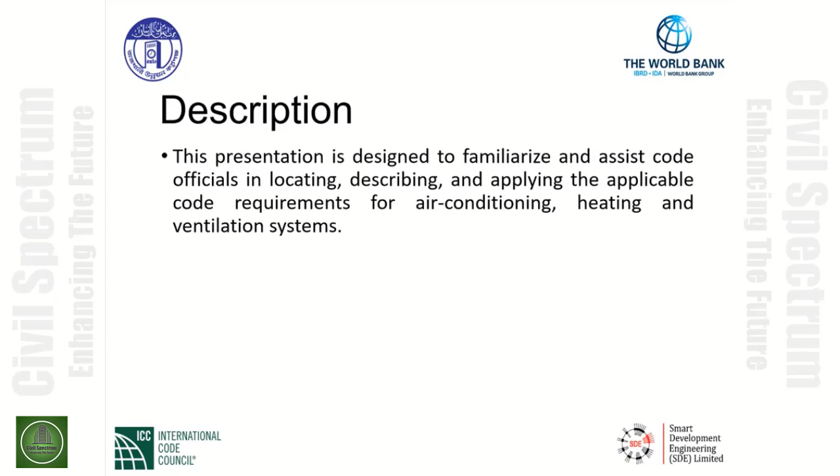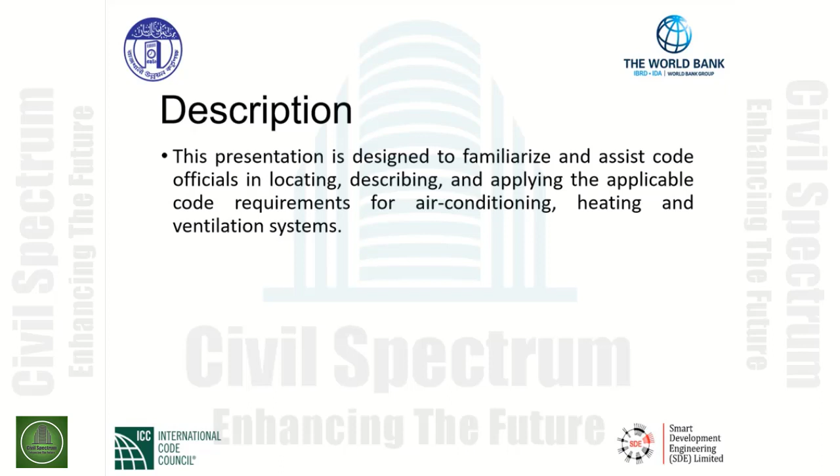The description of this presentation is designed to familiarize and assist code officials, inspectors, engineers, designers in not only locating the code sections, but describing and applying the applicable code requirements for air conditioning, heating, and ventilation systems. The overview.

Internationally, code officials recognize the need for a modern, up-to-date mechanical code that addresses the design and installation of mechanical systems through requirements, emphasizing performance. This presentation will cover key topics of the following areas. We will cover scope, application, and terminology. Terminology is so important. We need to understand certain language for mechanical systems. We will go over that systematically and accordingly.

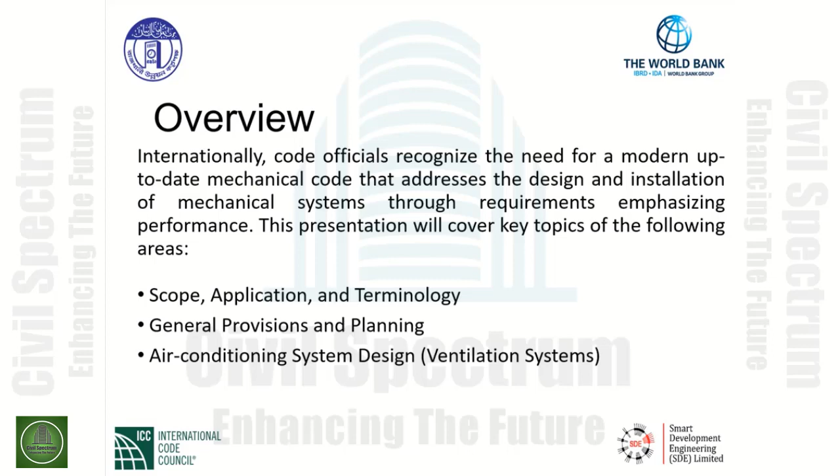Second part is general provisions and planning, and then we'll finish up with the air conditioning system design with the focus on mechanical ventilation systems and natural ventilation. The seminar goal. The goal of this training is for you to learn and apply key code requirements contained in Chapter 2, Air Conditioning, Heating, and Ventilation, to enhance your performance while inspecting these systems. We will also give you examples and applications based upon design criteria and examples as well.

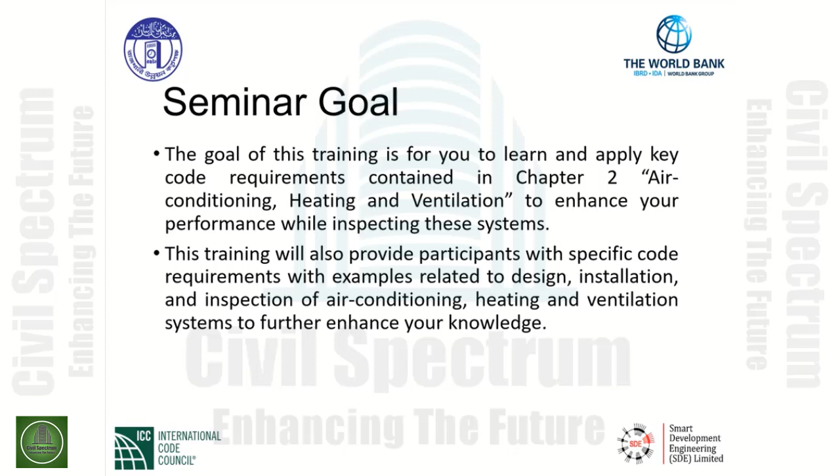This training will also provide participants with specific examples related not only to design, but installation and inspection of air conditioning, heating, and ventilation systems to further enhance your knowledge. The objectives of this presentation will allow you to be better able to locate general topics in Chapter 2 regarding air conditioning, heating, and ventilation. Locate applicable codes and standards for specific situations. Apply code requirements to real-world situations. And explain the intent behind a given code requirement.

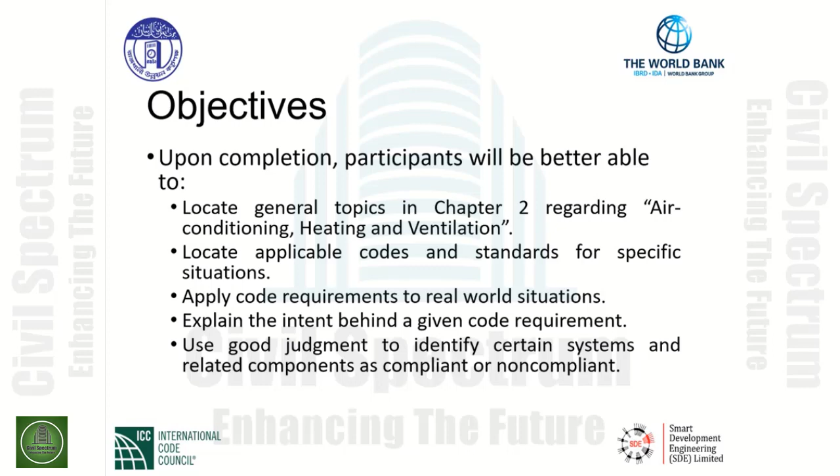We need to understand that the intent behind a given code requirement needs to be explained. It needs to be applied based upon applications. We'll go over that systematically. And finally, using good judgment to identify certain systems and related components, either as being compliant or non-compliant. And this is based on the requirements set forth in Chapter 2. Specifically, we will focus on ventilation systems towards the end of the seminar, and we'll have examples showing you the proper application of these requirements.

Chapter 2, Section 2.1, General. The purpose of this chapter is to provide minimum standards, not only for regulating and controlling the design, but also the construction, installation, quality of materials, location, operation, performance, as well as maintenance and the use of air conditioning, heating, and ventilation systems to ensure acceptable conditions of air inside the building required for human health, safety, and welfare with energy conservation. An air conditioning, heating, and ventilation code cannot be effective without adequate provisions for its administration and enforcement.

The authority or the official has the responsibility for establishing that the homes in which the citizens of the community reside and the buildings in which they work are designed and constructed to be reasonably free from hazards associated with the presence and use of mechanical equipment, appliances, and systems. We have this code as it states in the language that was initially introduced to provide human health, safety, and welfare with energy conservation. The code is designed with requirements, design criteria that engineers must use to properly design these systems, inspectors to inspect these systems, and this way the end result is a safe and healthy environment for everybody within homes and buildings.

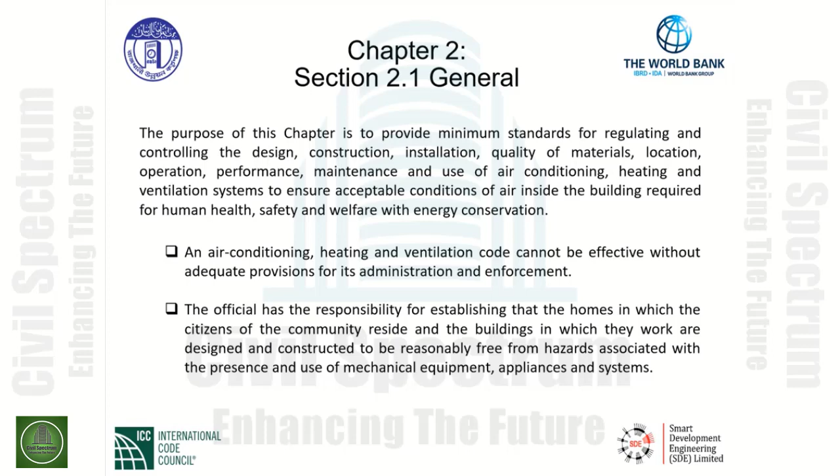The official or the authority is charged with the administration and the enforcement of mechanical regulations and also has great responsibility. And with this responsibility drives authority. We need to make sure that not only the design but the installation complies with the requirements of this code. Quality of materials are so important. The air conditioning, heating, and ventilation code intends to establish a minimum acceptable level of safety. We can exceed what the requirements are in this code, but we can never go below the minimum acceptable thresholds in this code.

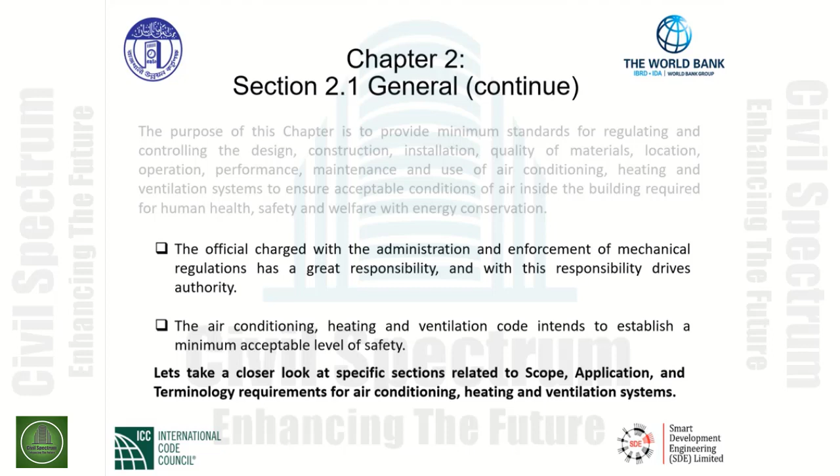So let's take a closer look at specific sections related to scope, application, and terminology requirements for air conditioning, heating, and ventilation systems. Section 2.2, Scope.

Specifically in Section 2.2.1, it indicates the provisions of this code shall apply to not only erection, but also installation, alteration, any repairs, maybe relocation of equipment, appliances, replacements are covered, as well as additions, maybe additions to air distribution systems, hydronic piping systems, things of that nature. Also use and maintenance of any air conditioning, heating, and ventilation systems. This section gives us the driving language as code users to understand our scope to get into this particular code. This section describes the types of mechanical systems covered by the code.

The code is applicable from the initial design of mechanical systems through installation and construction, and finally into the maintenance of operating systems. Our systems must be maintained. They must be cleaned regularly. They must comply with the manufacturer's installation instructions and maintenance as well for proper operation through the life of these systems.

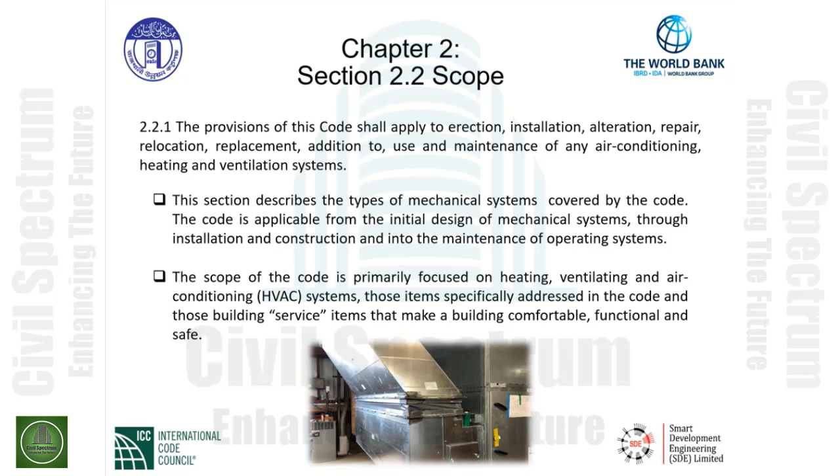The scope of the code is primarily focused on heating, ventilating, and air conditioning systems, HVAC systems. Those items specifically addressed in the code and those building service items that make a building comfortable, functional, and safe.

In section 2.2.3, this key section gives us the requirement where in any specific case, different sections of this code specify different materials, methods of construction, or other requirements. We need to look at the most restrictive one as that shall govern. Where there is a conflict between a general requirement and a specific requirement, the specific requirement shall be applicable.

The first part of this section essentially describes where there could be dual coverage and states that the most restrictive prevails. We will look periodically at a general requirement giving maybe a general layout, maybe a general area of installation. Whereas when you get deeper into the code, it may address a requirement more specifically based upon your application, which will have to be evaluated and looked at to be the most restrictive.

The code official must carefully evaluate each application regarding materials, methods of construction, or other requirements and make decisions that provide the greatest safety. And as mentioned previously, this is where authority comes in. We need properly trained people to administer this code, properly trained and technical people to enforce the code as well.

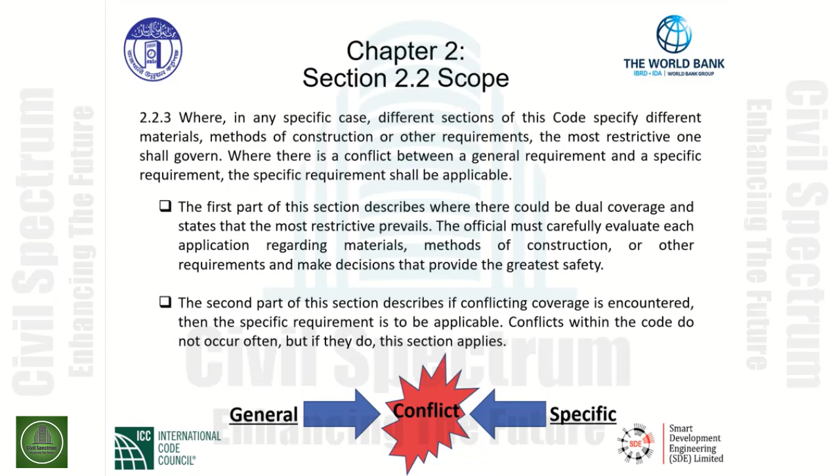The second part of this section describes if conflicting coverage is encountered, then the specific requirement is to be applicable. Conflicts within the code do not often occur, but if they do, this section applies. Chapter 2, Section 2.3, Application. It shall be unlawful to install, extend, alter, repair, or maintain air conditioning, heating, and ventilation systems in or adjacent to buildings, except in compliance with this code.

This section, ladies and gentlemen, is telling the code user that we need to comply with this code, not only for design and installation, but also extending systems. In the graphic below, we see that we have a hydronic piping system that has been recently extended from one part of the system to a new part for a building addition.

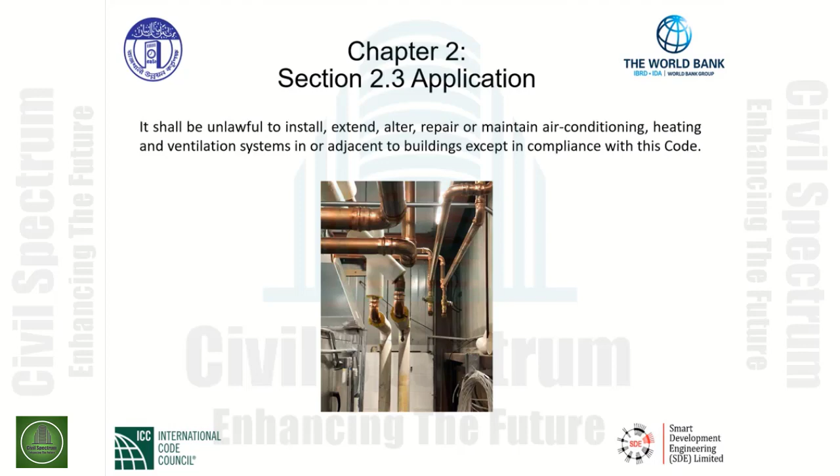It not only lends itself to installations, extensions, but also alteration, repairs, and maintenance as well. So the application covers everything with respect to the air conditioning, heating, and ventilation systems. This is the initial language and requirement that we need to get into in Section 2.3. Section 2.3.1 is now specific to existing installations.

Air conditioning, heating, and ventilation systems in existence at the time of adoption of this code may have their use, maintenance, or repair continued if the use, maintenance, or repair is in accordance with original design and location, and no hazard to life, health, or property has been created by such system. What this section is telling us specifically is the existing mechanical system is generally considered to be allowed to continue in accordance with the original design if the system meets a minimum level of safety.

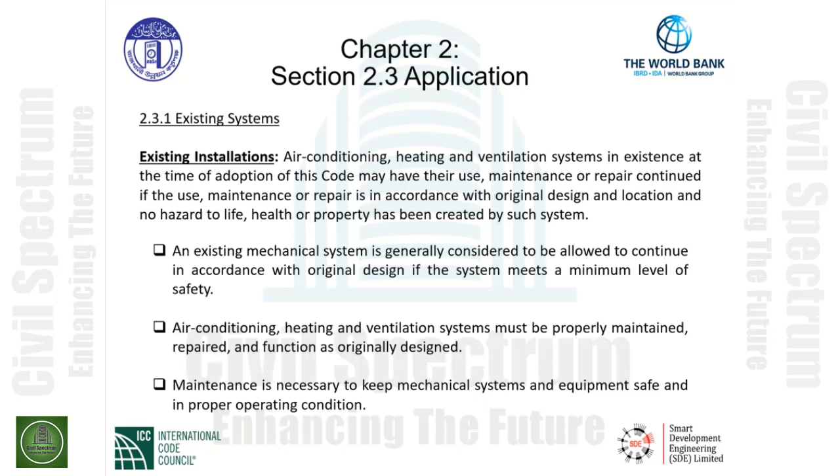We need to be concerned with the proper maintenance of these systems to keep them functioning as originally designed. The air conditioning, heating, and ventilation systems, of course, must continue to be properly maintained, properly repaired, and function, of course, as they were originally designed. Maintenance is so necessary to keep the mechanical systems and equipment safe and in proper operating condition.

Additions, alterations, or repairs. This is getting, again, more specific as it relates to additions of systems, alterations of systems, or repairs of systems that may be made to any air conditioning, heating, or ventilation system without requiring the existing system to comply with all the requirements of this code, provided the addition, alteration, or repair conforms to the requirements of a new system. Additions, alterations, or repairs shall not make an existing system unsafe, create unhealthy or overloaded conditions.

Now, this last language is the driving language of this section. As code users, we must understand that the existing systems have the right to exist, provided they have been maintained as originally designed and function accordingly, as we saw in the last slide. However, if we decide to provide any alteration or an addition to an existing system, it involves some extent of new work, then the new work is subject to the requirements of this code.

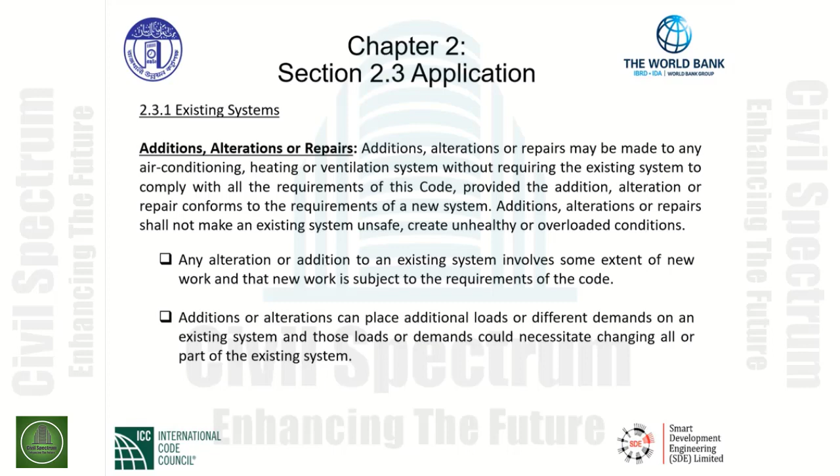Additions or alterations can place additional loads or different demands on an existing system, and those loads or demands could necessitate changing all or part of the system. So it's very important that we analyze the existing systems due to, again, these additional loads or different demands.

A duct addition example is shown here. The language in the code section that we just discussed: additions, alterations, or repairs shall not make an existing system become unsafe or create any unhealthy or overloaded conditions.

The picture below shows a new air distribution supply duct added to an existing system. Prior to adding the ductwork, the existing air distribution system was analyzed to verify the added demand on the system, and it was found that there was enough capacity to supply a new branch to a new building addition. This installation from the attachment of the existing system must comply with the new code requirements.

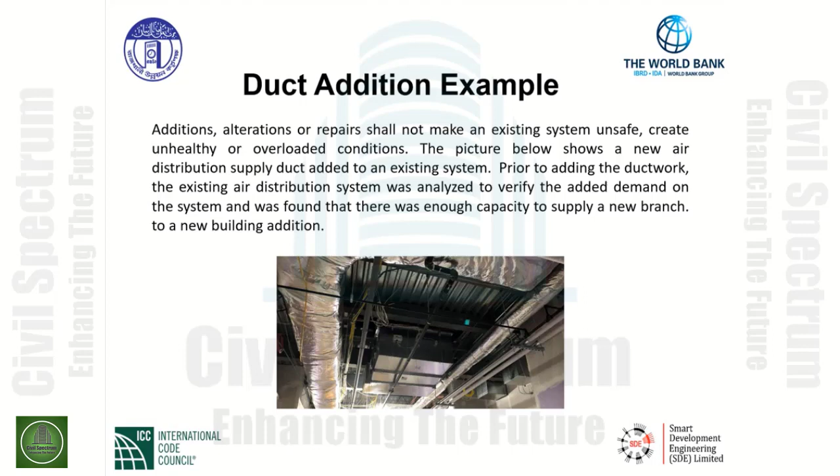Changes in building occupancy. Air conditioning, heating, and ventilation systems, which are part of any building or structure undergoing a change in use or occupancy, as defined in the building code, shall comply with all requirements of this code which may be applicable to the new use or occupancy.

When a building or any part of a building undergoes a change of occupancy, not only the building but the mechanical system must be evaluated to determine what effect the change of occupancy has on it. And depending on the nature of the previous occupancy, changing a building's occupancy classification could result in a change to the mechanical system. A change in occupancy could require changes to an existing mechanical system to accommodate the needs and requirements for the new occupancy.

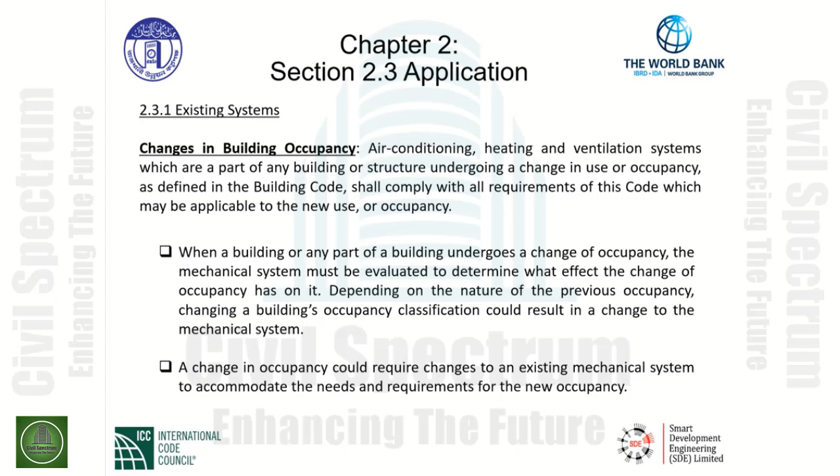We may be into exhaust systems. We may be into increasing the ventilation, bringing in more outdoor air to dilute contaminants in certain areas and zones of the building, whereas the previous occupancy did not have such a high demand. And again, it's all dependent upon the new use or occupancy that the building or space is being changed to that must be analyzed.

Consider an office building that will be converted to a restaurant. The mechanical systems must be altered as necessary to comply with what the code prescribes for such assembly occupancies. This is clearly a change in occupancy, or in other words, the existing office building will function much differently as a restaurant. The restaurant is more densely populated in the dining room, whereas in an office building we do not have such a dense population.

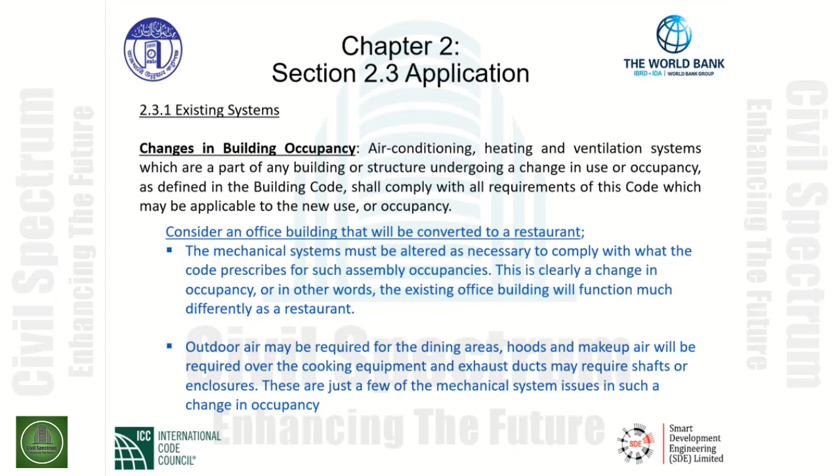Additionally, with a restaurant, we may have a commercial kitchen installed that needs exhaust systems, makeup air systems, and heating, cooling, and ventilation systems installed for that function within the new restaurant. Outdoor air may be required for the dining areas. Hoods and makeup air will be required over the cooking equipment. And exhaust ducts may require shafts or enclosures that must be compliant with the building code requirements. These are just a few of the mechanical system issues in such a change in occupancy.

The change of occupancy indicated in the photos below involved an existing office building that was converted to a restaurant. This is considered a change of occupancy. The office building was converted to a restaurant that includes a dining room and a brand new commercial kitchen. The new commercial kitchen required new air conditioning, new exhaust systems, a makeup air system, and ventilation systems to be installed. And as you can see in the picture on the left-hand side, we have the exhaust equipment and appliances coming through the roof of the building.

Additionally, the seating area of the restaurant required the existing air conditioning system to provide more ventilation, given more occupants in that area. This is a mechanical ventilation system that brings in outside air. It was analyzed and modified to introduce more outside air in liters per second and was calculated for the occupant density given this new change of occupancy.

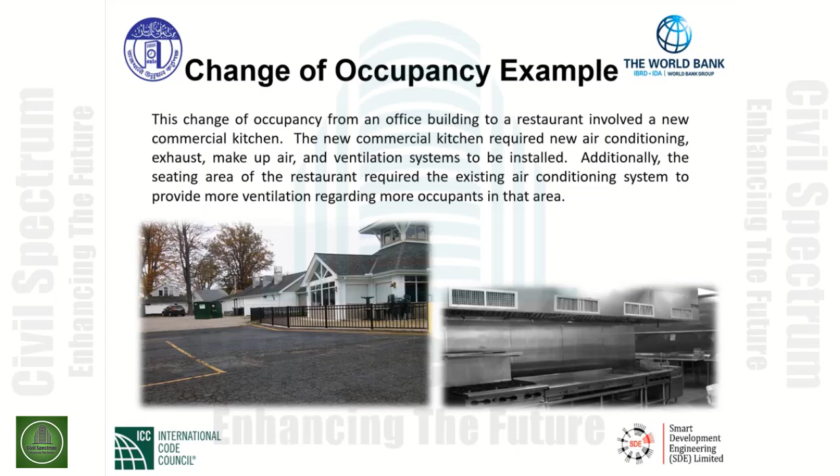Maintenance. All air conditioning, heating, and ventilation systems, materials, and appurtenances, both existing and new, and all parts thereof shall be maintained in proper operating condition, in accordance with the original design and in safe, hazard-free condition.

Additionally, we need to look at this last couple of sentences. All devices or safeguards which are required by this code shall be maintained in accordance and conformance with this code. The owner or the owner's designated agent shall be responsible for maintenance of the systems and equipment.

Maintenance is necessary to keep the mechanical systems and equipment safe and in proper operating condition. We typically have safety devices, controls that need to be maintained in order to continue providing the protection that they afford. Additionally, all safeguards required by the previous or present codes must be maintained for the life of the equipment or systems served by those safeguards.

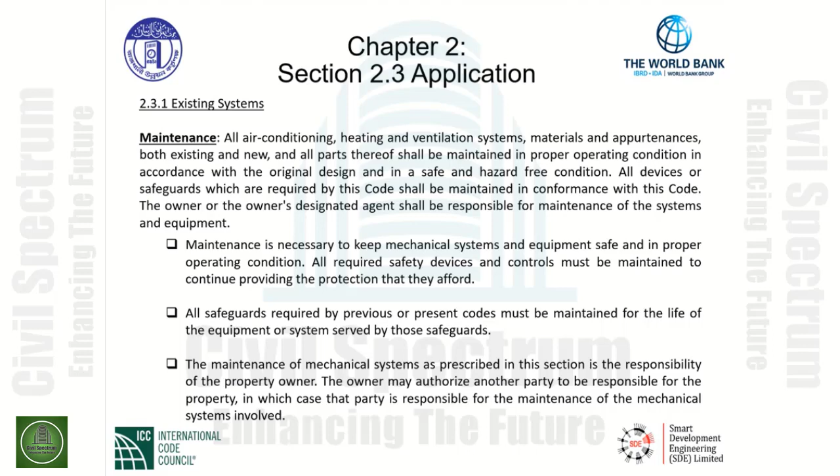Lastly, the maintenance comes in, and it was indicated the maintenance of mechanical systems as prescribed in this section is the responsibility of the property owner. The owner may authorize another party to be responsible for the property, in which case that party is responsible for the maintenance of the mechanical systems involved.

Section 2.3.2 contains requirements for alternative materials and methods of construction. The provisions of this code are not intended to prevent the use of any material or method of construction not specifically prescribed by this code, provided any such alternative material and/or method of construction has been approved and the use authorized by the authority.

The fact that a material, a product, or method of construction is not addressed in the code is not an indication that such material, product, or method is intended to be prohibited. The authority is responsible for determining if a requested alternative provides the equivalent level of protection to public property, health, safety, and welfare as required by code.

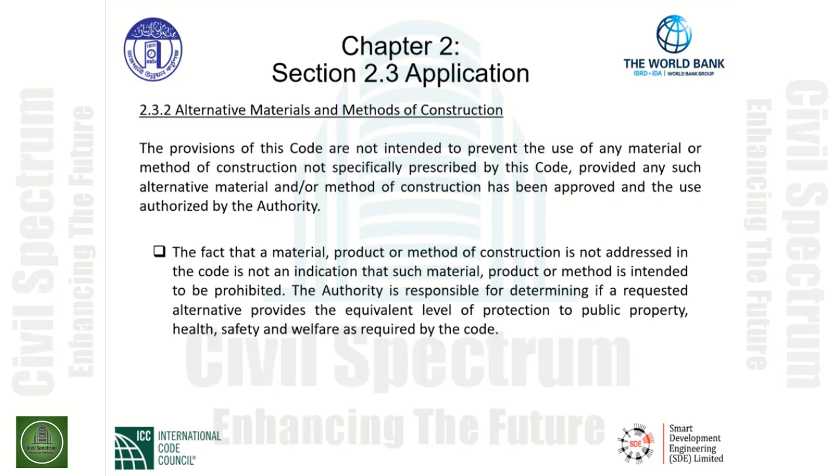Now, an alternative material may be an application-related material that fits the engineered design and can be approved by the authority. The authority shall require, however, that sufficient evidence or proof be submitted to substantiate any claims made regarding the use of alternatives.

As stated in this particular requirement, the alternative material or method of construction may be approved where, in fact, the authority finds that the proposed design is satisfactory and complies with the intent of the provisions of this code, and that the material, method, or work offered is, for the purpose intended, not less than the equivalent of that prescribed by this code in quality, strength, effectiveness, fire resistance, durability, and safety.

So as you can see here, given that we do have the alternative materials and methods of construction section, the main part of this requirement is that the quality of materials, perhaps the strength of materials, the effectiveness, even fire resistance rating, along with durability and safety, is a key requirement that must be analyzed and proven to the authority. Once the authority has that data, then the authority can approve alternative materials and methods of construction.

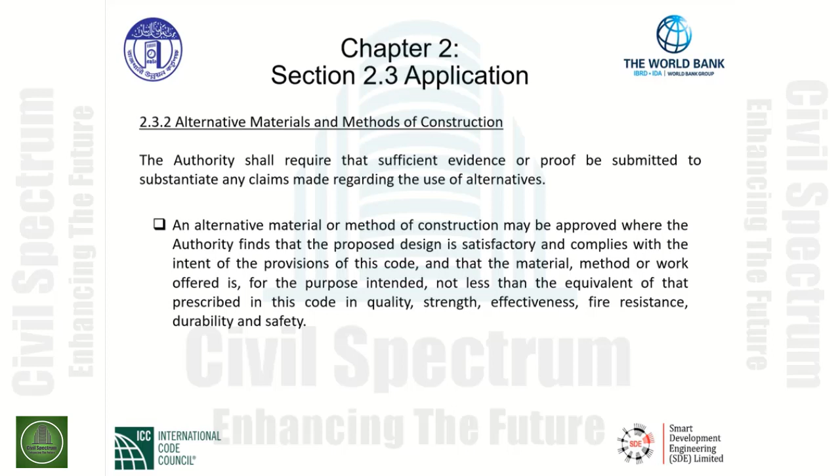An example is the ICC Evaluation Service Report. Testing methods specified in this code or by other recognized test standards, along with the testing performed by approved agencies, can be submitted to the authority. This is a mechanism that can be submitted to the authority for approval.

These research reports from approved sources may be submitted when an alternative material or method is proposed for construction. The ICC Evaluation Service is just one example of an agency that provides research reports for alternative materials and methods.

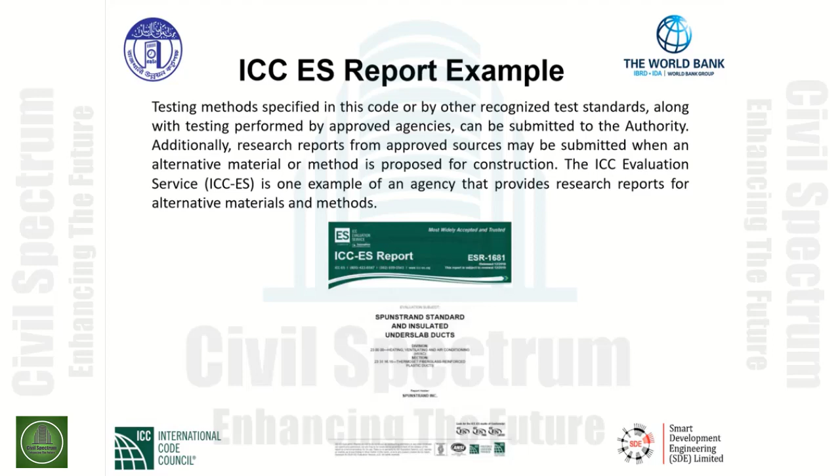Modifications. Now, modifications are not prohibited by the code. The authority, within the limitations set forth in Part 2, of course, may allow modifications for individual cases. The modifications, however, must be in conformity with the intent and purpose of the code, and such modification shall not lessen health, life, and fire safety requirements.

Now, this may be a modification to maybe a piping method being installed, maybe a duct method, or even a material, things of that nature, that must be modified given an application. Again, the authority should be provided with the analysis and intent of the modification in order to make a good decision, and determine if the modification fits the intent of the code.

So the code official or authority may amend or make exceptions to the code as needed, where strict compliance is impractical. This section is not intended, however, to permit setting aside or ignoring a code provision. Rather, it's intended to provide acceptance of equivalent protection.

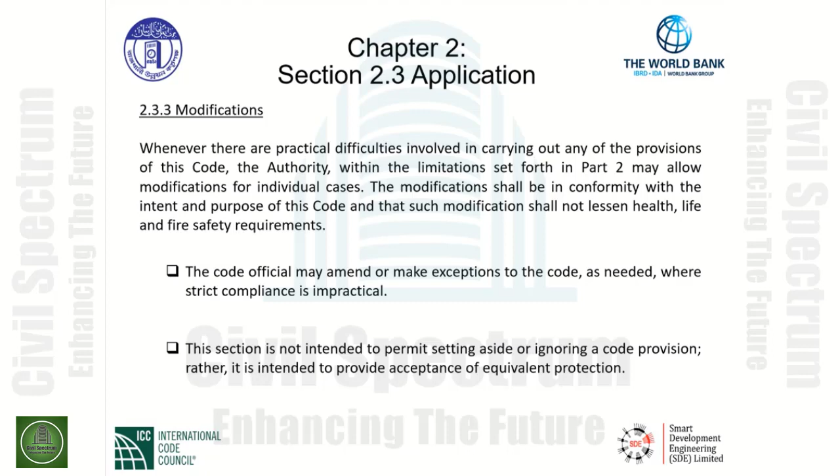As in construction, there are changes, there are modifications, there are amendments all the time, and we have to work through the process as engineers, installers, inspectors, and authorities.

Section 2.4, Terminology. Terminology is key, ladies and gentlemen. We need to specifically understand certain words, or maybe even a single word within a code section, to fully understand the intent of the code. So it's very important that we understand the language of air conditioning, heating, and ventilation.

This section provides an alphabetical list of the terms used in and applicable in this chapter of the code. In case of any conflict or contradiction between the definition given in this section and that in Part 1, the meaning provided in this section shall govern for interpretation of the provisions of this chapter.

Now, a code provision could be misinterpreted if the definition of a term as used in the context of the code is not understood. This reinforces why we need to understand the terminology for air conditioning, heating, and ventilation systems. The following slides will provide key definitions that will assist the code user to properly understand certain terminology related to this chapter.

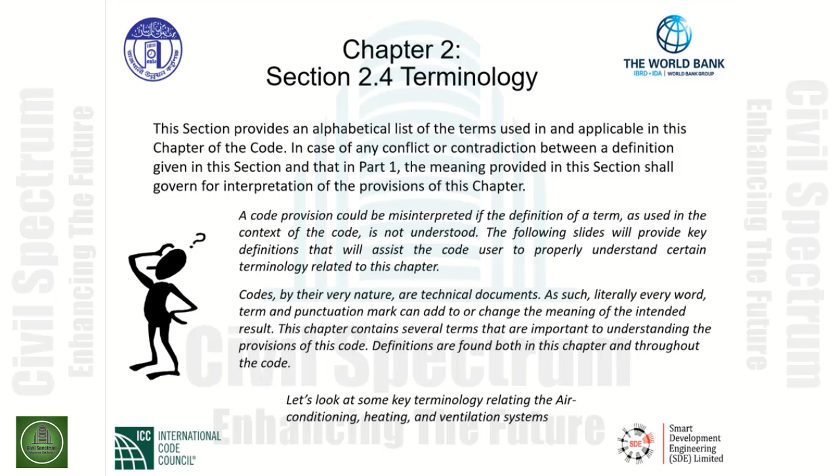Codes, by their very nature, are in fact technical documents. As such, literally every word, term, and punctuation mark can add to or change the meaning of the intended result. This chapter contains several terms that are important to understand the provisions of this code. Definitions are found both in this chapter and throughout the code. Let's look at some key terminology relating to air conditioning, heating, and ventilation systems.

Air change. Air change, by definition, is introducing new, cleansed, or recirculated air to conditioned space, measured by the number of complete air changes per unit time. The following example provides an illustration and calculation of an airflow rate entering and leaving a space. The calculation provides a number of air changes per hour, given the airflow rate and volume of space.

As seen, we have a volume of space that essentially measures 1,000 cubic meters. We have an airflow rate entering at 100 liters per second and an airflow rate leaving at 100 liters per second. The air leaving would be, in fact, the exhausted air, while the entering air is new air, completely cleansed or recirculated to the conditioned space.

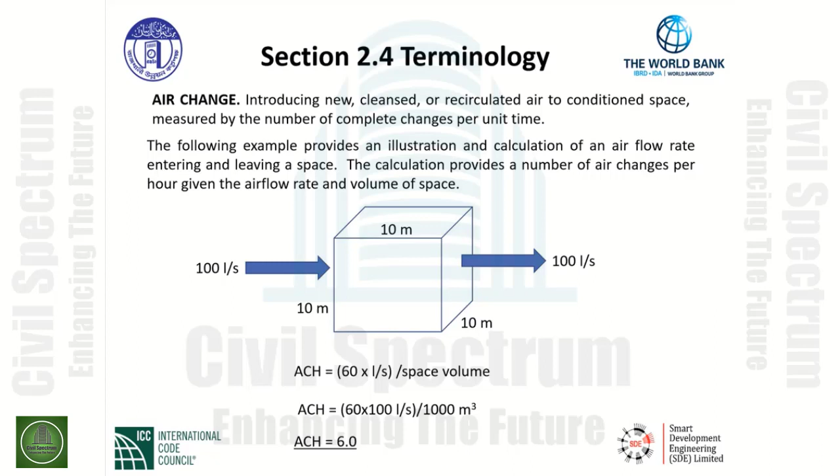The air change per hour expression, or the equation below, is as follows. The unit time we will use here is 1 hour. Air changes per hour equals the quantity 60 times the airflow rate in liters per second divided by the space volume. So in this example, we simply take 60 times 100 liters per second divided by 1,000 cubic meters. And the total air change per hour is 6 air changes per hour.

Another definition, outside air. Outside air, by definition, is very specific here. It is external air, atmosphere exterior to refrigerated or conditioned space, ambient air, or we say surrounding air. Recirculated air is in fact the part of return air passed through the air conditioner before being resupplied to the conditioned space. We also know this as return air.

Air conditioning is defined as the process of treating air so as to control simultaneously its temperature, humidity, purity, distribution, pressure, and air movement to meet the thermal requirements of the space. As you can see, this definition is very complete with respect to the criteria that goes into designing the air conditioning for a space.

As indicated, the temperature must be analyzed and maintained accordingly for the end result of this space function. Humidity as well, air purity, the distribution, the pressure, and of course, air movement into and through the space is of importance. Now going back up to the first definition that we indicated, outside air.

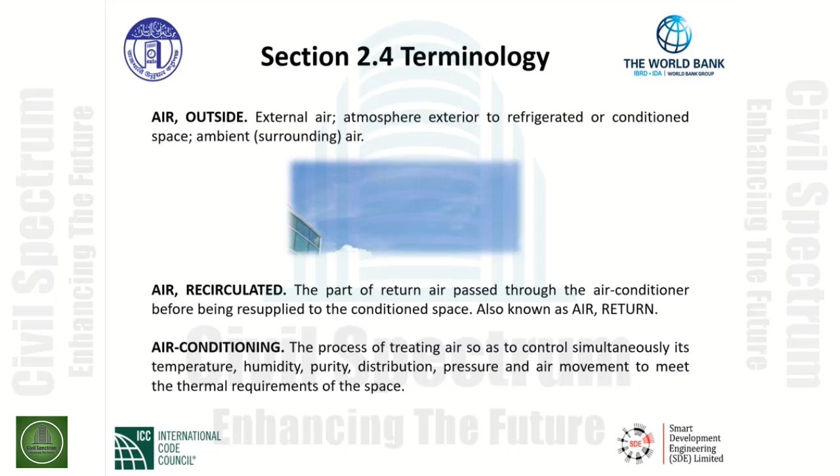This is important because in our buildings where we cannot provide natural ventilation, we must provide mechanical ventilation. That is, to take outside air into our air distribution system, air conditioning system, and mix it and deliver it to what we call the breathing zone to dilute contaminants within our buildings. And we'll speak more of that in several slides coming up.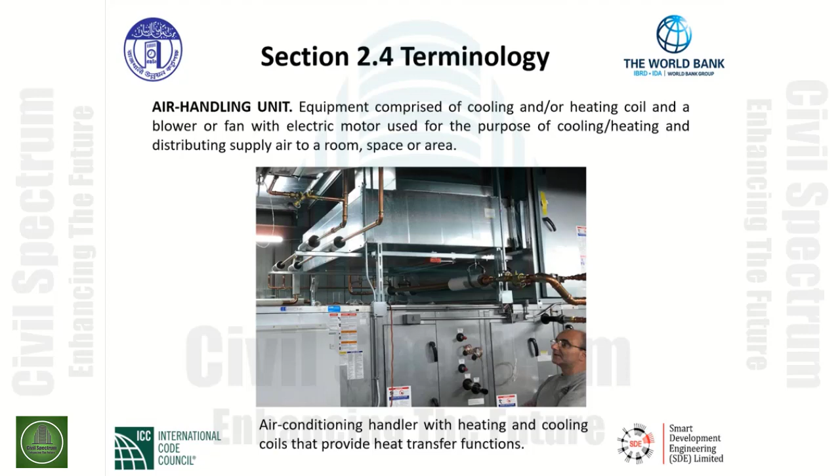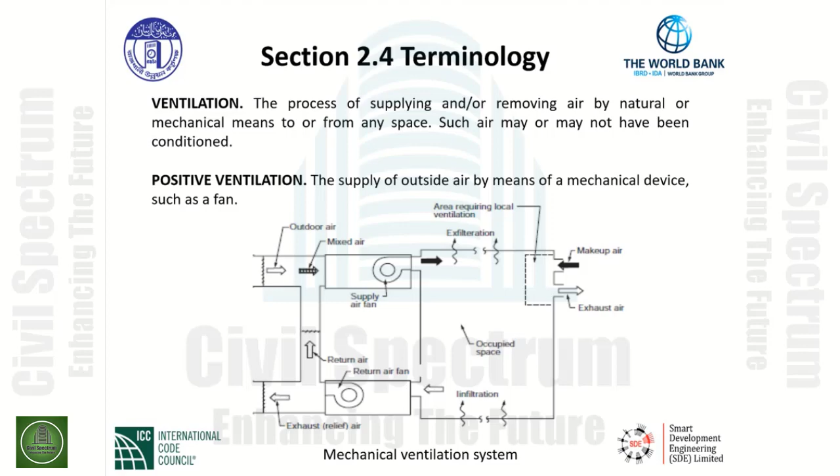We have an exhaust, relief air, and return air moving back up and then mixing again with the outdoor air to provide good, clean, filtered air into the occupied space. And this is a good example of a mechanical ventilation system and air conditioning system.

Section 2.5, General Provisions. This section provides references for air conditioning, heating, and ventilation systems, as well as associated electrical, plumbing, fuel gas, and fire safety requirements. Now, Section 2.5.1 references the ASHRAE handbooks. ASHRAE is the American Society of Heating, Refrigerating, and Air Conditioning Engineers. HI is referenced here, the Hydraulic Institute of USA.

These manuals and relevant chapters of this code for air conditioning, heating, and ventilation systems regarding the following: design, construction, installation, operation, and maintenance, give the code user a good design reference when it comes to designing air conditioning, heating, and ventilation systems by simply using these reference standards.

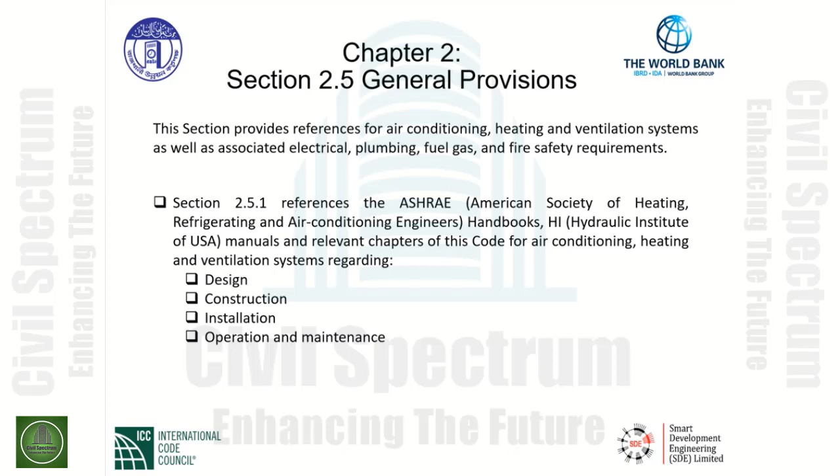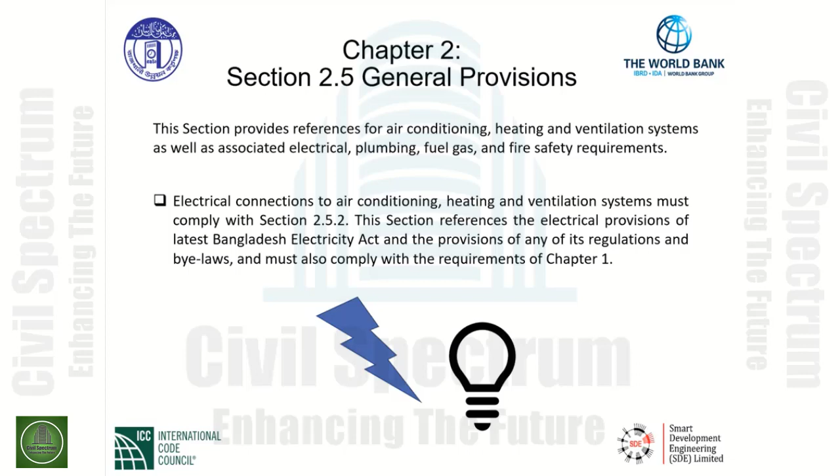This section provides references for air conditioning, heating, ventilation systems, as well as, again, the electrical, plumbing, fuel gas, and fire safety requirements. When it comes to the electrical requirements, any electrical connections to air conditioning, heating, and ventilation systems must comply with Section 2.5.2. This section references the electrical provisions of the latest Bangladesh Electricity Act and the provisions of any of its regulations and bylaws, and must also comply with the requirements of Chapter 1.

Section 2.5.3 gives us requirements for all plumbing work in connection with air conditioning, heating, and ventilation systems shall be carried out in accordance with the provisions and guidelines of ASHRAE handbooks and HI manuals. Additionally, Section 2.5.4 gives us requirements for all gas and fuel piping in connection with air conditioning, heating, and ventilation systems shall be carried out in accordance with the provisions of Chapter 8.

Below is an example of a boiler that is a gas-fired boiler. As you can see, there is gas fuel piping, and in this case, the provisions of Chapter 8 would have to be followed. So this particular set of sections is giving us a direction for additional requirements to the air conditioning, heating, and ventilation systems that are very specific to plumbing work, gas, and fuel piping.

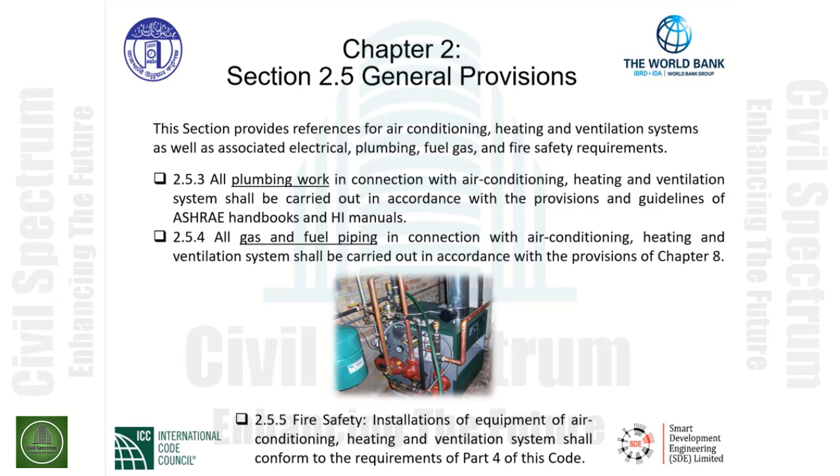The last section here, Section 2.5.5, deals with fire safety and indicates the following: installations of equipment of air conditioning, heating, and ventilation system shall conform to the requirements of Part 4 of this code. Again, giving some direction to fire safety requirements of the equipment that is related to air conditioning, heating, and ventilation systems.

Planning. Section 2.6 gives us the requirements regarding all relevant aspects of air conditioning, heating, and ventilation system installations. They need to be analyzed and evaluated properly during the planning stage of the building in order to determine the necessary provisions to be kept in the building for proper, safe installation of the system, machinery, equipment, and other facilities. There are many, many items in this section that will help the code user, the engineers, the architects in the designing of specific mechanical systems within the building.

Section 2.6.1.3 helps us understand, where necessary, all plans, calculations, specifications, and data for air conditioning, heating, and ventilation systems serving all buildings and all occupancies within the scope of the code shall be supplied to the authority for review purposes.

This is important, ladies and gentlemen, because the authority must review the necessary construction documents, the installation documents, the calculations, even the specifications and data for our mechanical systems that are very specific to air conditioning, heating, and ventilation. The authority makes sure that the systems have been engineered properly and can be installed within the buildings safely for their end use.

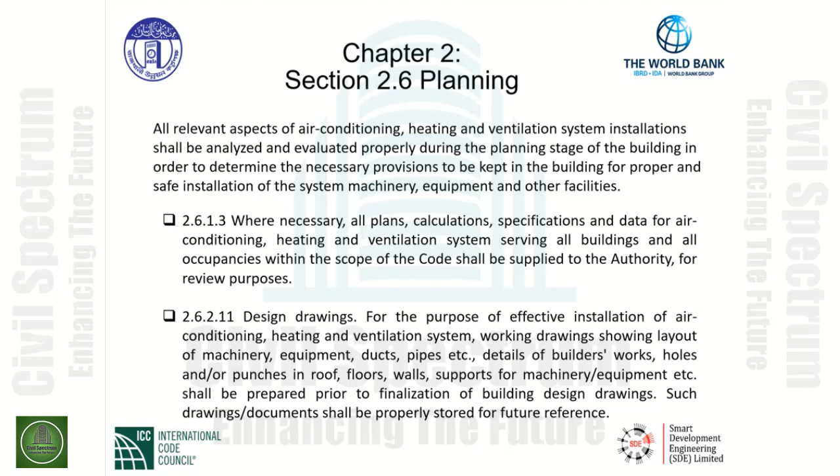Again, giving specific installation and layout drawings and routing drawings of the equipment and systems specifically is a requirement in this section.

Ventilation air. Section 2.7 is titled Air Conditioning System Design Ventilation Air. There are two very important sections here that have to be noted by the code user. The first section is Section A, that indicates every space served by the air conditioning system shall be provided with outside fresh air not less than the minimum amount mentioned in Table 8.2.3.

If adequate temperature regulation along with efficient filtration of air and absorption of odor and gas are provided, the amount of fresh air requirement may be reduced. However, in no case the outdoor air quantity shall be lower than 2.5 liters per second per person. When we read this section, there's a whole bunch of information in this section.

What this section is talking about is what we call mechanical ventilation. And it gives a very specific table. Table 8.2.3 is referenced. We will take a look at Table 8.2.3 and give an example, work through a calculated example for ventilation, mechanical ventilation. As seen here, the minimum airflow quantity cannot be lower than 2.5 liters per second per person.

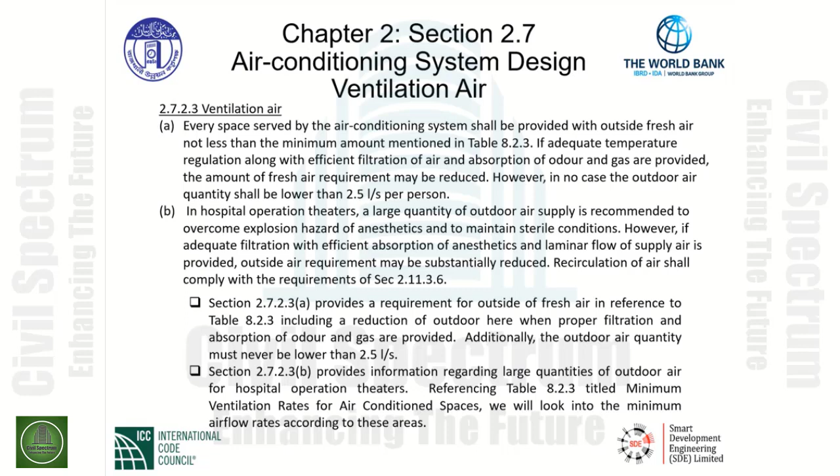Focusing on protecting the health of the building occupants, the provisions of this chapter provide requirements that are intended to control contaminants within buildings, such as carbon dioxide, and contaminants from entering buildings, such as pollutants, vehicle exhaust from a nearby street, just to name a few.

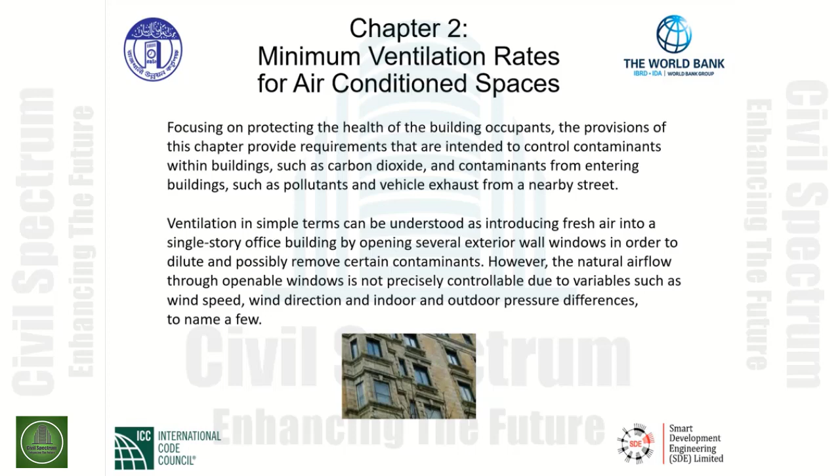Ventilation in simple terms can be understood as introducing fresh air into a single-story office building by opening several exterior wall windows in order to dilute and possibly remove certain contaminants. That is what we call natural ventilation. However, the natural airflow through openable windows is not precisely controllable due to variables such as wind speed, wind direction, indoor and outdoor pressure differences, just to name a few. So again, where natural ventilation is allowed by this code, we will find out where, it is not precisely controlled.

Consider an office building without openable windows on the exterior walls. Providing ventilation air to occupied spaces within these types of buildings can be achieved by mechanically controlling air flowing from outdoor air louvers into the HVAC air distribution system that mixes with heated or cooled air and is distributed throughout ducts and diffusers and delivered to all occupied spaces within the building.

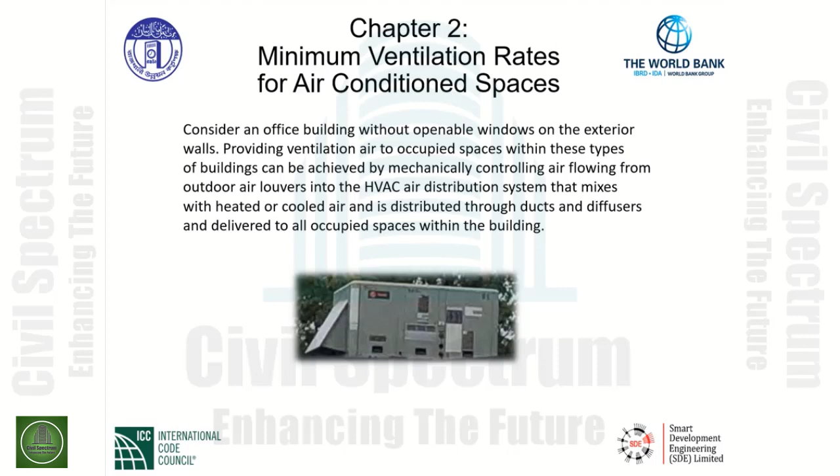When we take outside air into our air distribution system, we want to take that fresh air, filter that fresh air and distribute it into what we call the breathing zone, which we will qualify shortly. Table 8.2.3 is titled Minimum Ventilation Rates for Air-Conditioned Spaces. As seen here, the table gives us much information about the occupancy classification, airflow rates, and in the very last column, there's an exhaust airflow rate as well.

This table, Table 8.2.3, is based on ASHRAE 62.1 called the Ventilation Rate Procedure. This table prescribes both the use of 100% outdoor air as ventilation air and an occupant load calculation method for ventilation purposes only.

The occupant load utilized for the design of the ventilation system must not be less than the number determined from the estimated maximum occupant load rate indicated in Table 8.2.3.

Ventilation rates for occupancies not represented in Table 8.2.3 shall be those for a listed occupancy classification that is most similar in terms of occupant density, activities, and building construction, or shall be determined by an approved engineering analysis.

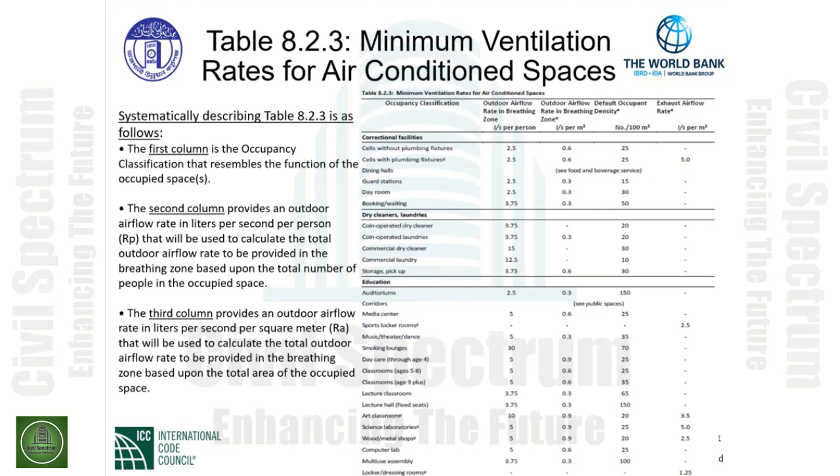Again, this variable goes into an equation to calculate the overall outdoor air to be brought into the air distribution system in a mechanical ventilation system. The fourth column provides occupant density for ventilation only. So the fourth column will provide us an occupant density for the number of people per 100 meters squared of area that will allow the total number of people to be calculated for ventilation based upon the occupancy classification of the space.

We will use the auditorium space as the occupancy classification, and intersecting that with the column, it gives us 150 occupants per 100 square meters. This is the value or the ratio that we will utilize in a calculation to calculate the population of the zone. We will go through this systematically and integrate what we have picked here in the table into an equation for the amount of people in this particular area.

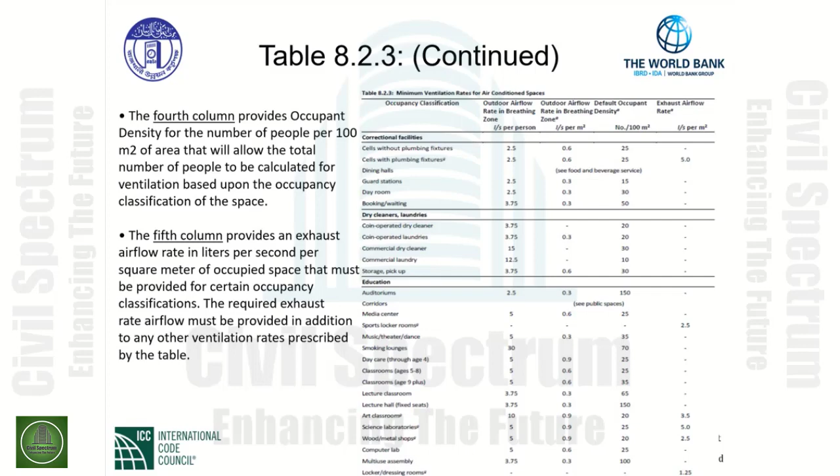As an example, food and beverage service category, dining rooms must be provided with a person airflow rate of 3.75 liters per second after calculating the default occupancy density. The area airflow rate of 0.9 liters per second per meter squared must be multiplied by the area of zone. And the occupancy classification you can see here is food and beverage service.

So what we're doing here is we are picking values from this table to integrate into an equation to ultimately calculate the total amount of outside air required for these particular spaces based upon the function of these spaces within our buildings.

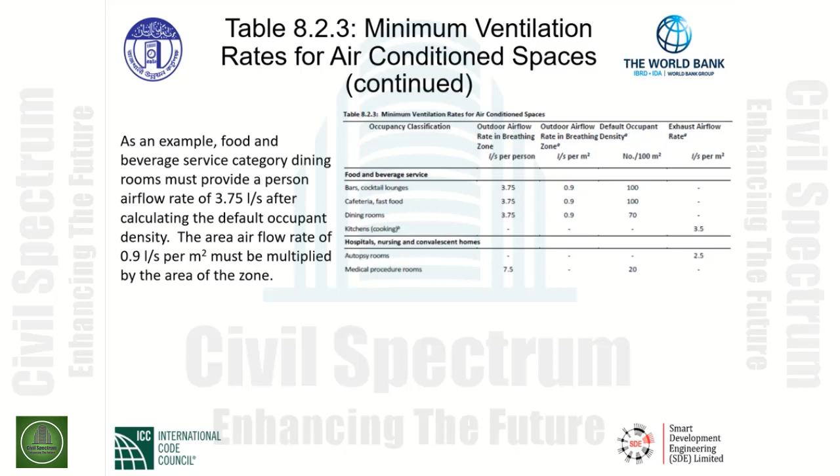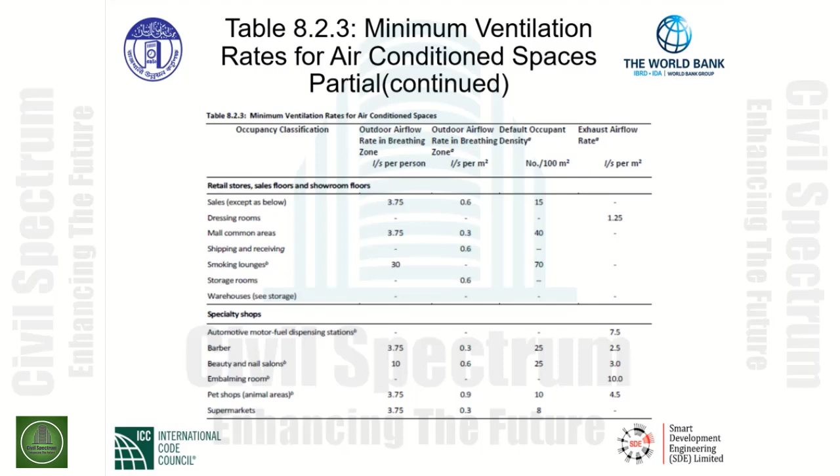The notes to the table are given here. We have note A through H. Now, the notes are a function of the table. You need to reference the notes accordingly when they're referenced and when they're not. So the code user must always go to the very bottom of the table to, in fact, check to see if any of the notes are applicable to their design, to their inspection area.

For example, note H. Note H is given to us for nail salons. This is a specific requirement here, and it gives you a specific exhaust requirement in the ventilation table for nail stations such as tables or other systems that need to provide a source capture system. Means a local exhaust system capable of exhausting 25 liters per second per nail station. That's a specific note. And as you can see, all of the other notes are pretty important with respect to different areas within our buildings.

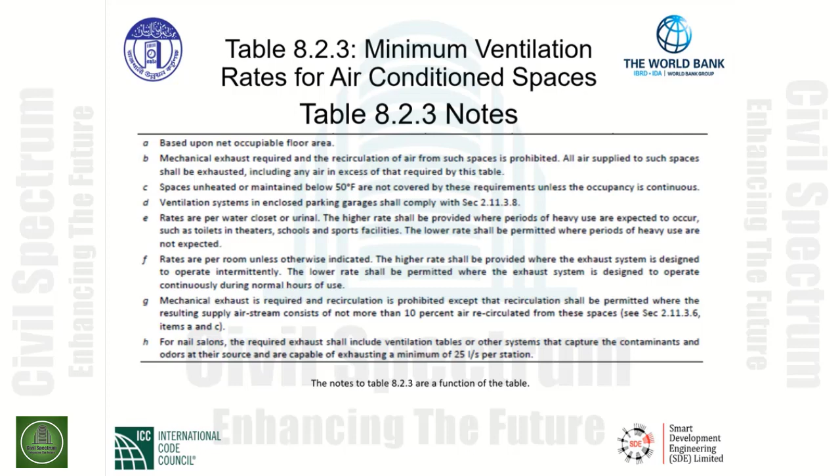When we go to section 2.11.1.1 scope, the provisions of this section shall govern the ventilation of spaces within a building intended for human occupancy. Now, this is where we provide the requirements in the code for ventilation. Where required is given to us in section 2.11.1.2, in that every space intended for human occupancy shall be provided with ventilation by natural or mechanical means during the periods when the room or space is occupied. Now, this particular section comes out and gives the designer a choice whether to use natural or mechanical means.

As we further discover the requirements in this particular section, we move to section 2.11.2.1, and this provides specific requirements regarding sources of natural ventilation. Where can we take natural ventilation from? Natural ventilation of an occupied space shall be through windows, doors, louvers, skylights, or other openings to the outdoors. We must take clean, fresh air into the building utilizing these openings in our buildings. Such ventilating openings shall open to the sky or a public street, space, alley, park, highway, yard, court, plaza, or other approved space which comply with the requirements of the building code.

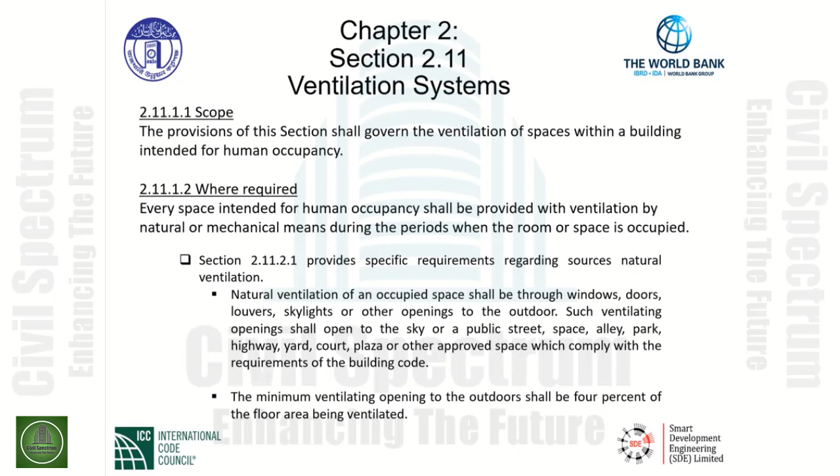A word of caution here: when you have natural ventilation openings, we need to make sure that we do not draw in contaminants such as exhaust from the public streets, things of that nature. So it's up to the designer to properly indicate where these openings are going to be located on the building, again, to bring in clean, fresh outdoor air. The minimum ventilating opening to the outdoors shall be 4% of the floor area being ventilated. So there's a requirement now that once we calculate the floor area, we need a minimum of 4% openable to the outdoors.

The contaminants that need to get exhausted cannot be overlooked here. That's why section 2.11.2.3 provides this requirement when we have naturally ventilated spaces. When we have these naturally ventilated spaces having contaminants present, these areas or spaces need to comply with the requirements of section 2.8.3. So it sends us in the direction of providing an exhaust system. After all, natural ventilation is essentially just bringing fresh air into the building. It does not provide a dynamic way to remove exhaust from locations such as kitchens, toilets, or bathrooms. And we need an independent mechanical exhaust system to provide the exhaust from those particular spaces to remove the contaminants safely.

And we will go to section 2.11.2.3. As seen here in the graphic below, we have a bathroom exhaust system, and it is independent and serving that particular space only in a naturally ventilated building. And that's how we comply with this section, by understanding that we have a code section indicating contaminants that need to be exhausted, and the code is referring us to section 2.8.3 to carry out those requirements.

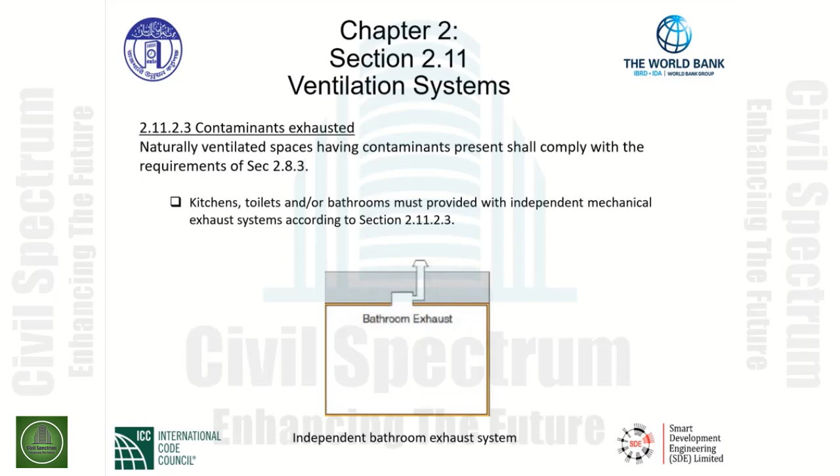Natural ventilation is given here. In order to provide natural ventilation, openings must communicate with the outdoor air. Openings to the outdoor air, such as doors, windows, or louvers, provide natural ventilation. In other words, we need openings to the exterior to draw in fresh air and properly ventilate the building. Not only draw in fresh air, but we hope that the air that's drawn into the building will somewhat disperse through the building and be exhausted out the same openings naturally.

Again, there is no mechanical means to draw in outside air and exhaust stale air from the building. We are reliant upon pressure differentials within the building and the outdoor atmosphere. So the operating mechanism for such openings shall be provided with ready access so that the openings are readily controllable by the building occupants. In other words, we need to open up a window easily. We need to open doors easily. They need to be readily accessible.

Now, in order to qualify for natural ventilation, the minimum openable area to the outdoors must have 4% of the floor area being ventilated. Note that section 2.11.2.2 A and B provide additional requirements where rooms and spaces without openings to the outdoors are ventilated through an adjoining room and openings below grade.

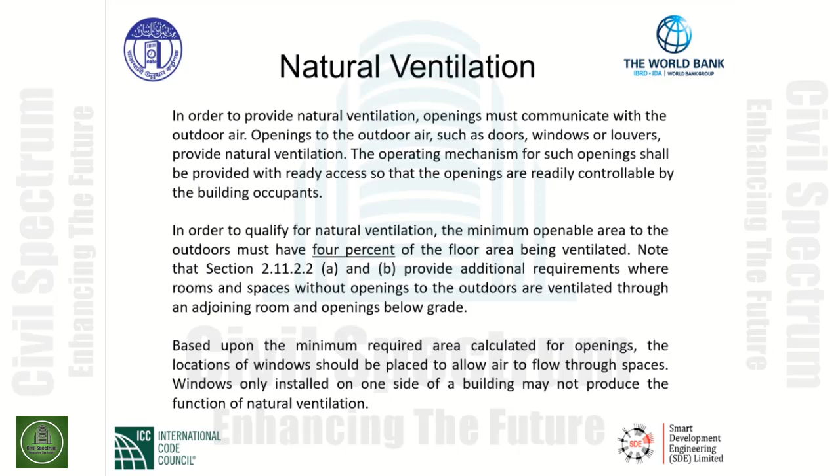Based upon the minimum required area calculated for openings, the locations of windows should be placed to allow air to flow through spaces. Windows only installed on one side of the building may not produce the function of natural ventilation. In other words, we need cross ventilation to take in air possibly from one side of the building where we have pressure differentials from that point of air entering through the building to the other side of the building, and provide some means to allow air to flow completely through the building from one side and out of the other side due to the pressure differentials.

Let's talk about an example of how to provide this natural ventilation. Consider a new one-story office building with floor dimensions indicated in the plan below. The proposed building is to be naturally ventilated. What is the required minimum openable area to the outdoors to be installed? As shown here, it's a smaller building, new office building. The dimensions, as indicated here, are 20 meters by 15 meters. The natural ventilation will be through openings such as windows, indicated as seen here on the exterior wall. These are openable windows.

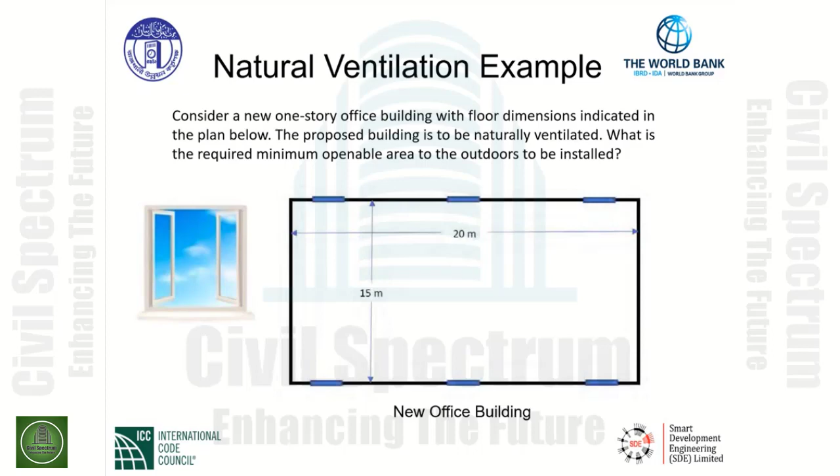We need to calculate the building floor area to be ventilated. That's our first step. So simple calculation of area of the building is 15 meters by 20 meters gives us 300 square meters. We need to calculate the minimum openable area required by the section, indicating 4% of the area to be openable to the outdoors. So we calculate the minimum openable area. We take 300 square meters times the decimal equivalent of 4%, which is 0.04, and that equates to 12 square meters of minimum openable area that must be provided for natural ventilation.

Now, when this method is provided, the authority must review the plans and make sure that the minimum openable area complies with the code. As inspectors out in the field or on the job site, we need to verify that the openings have been placed in their proper locations according to the approved construction documents, and verify that the opening area is compliant with the design and this code.

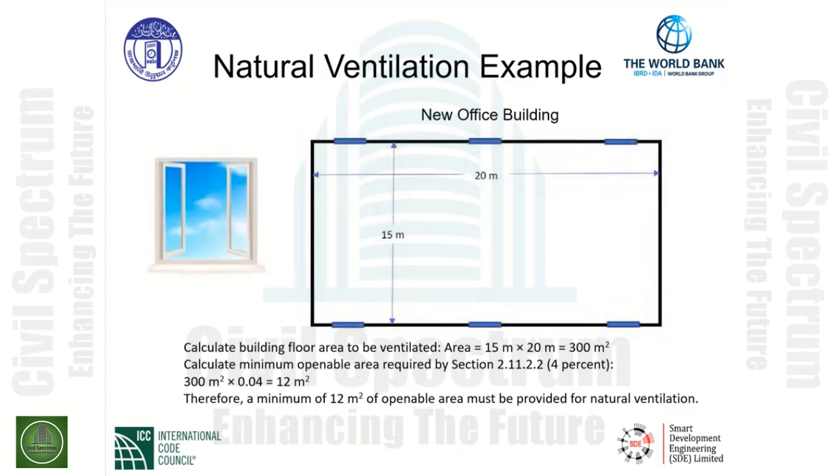Referencing mechanical ventilation, we go to section 2.11.3.4 for minimum outdoor air. The minimum outdoor air is required in accordance with table 8.2.3. That is the first part that's given to us in this section.

And we recall from that table there are 5 columns in the table. The first column being the occupancy classification. The second column is the rate of airflow in liters per second per person in the breathing zone. The third column was the area airflow rate in square meters based upon the area of that particular occupancy or zone. The next column, the fourth column, was the occupant density column.

We use the occupant density column to calculate the number of people in the breathing zone. And then finally, the very last column, as you recall, is the exhaust airflow rate that may or may not be required based on certain spaces in the building. Now, we're given that requirement here for minimum outdoor air. This is mechanical ventilation. That is the first part.

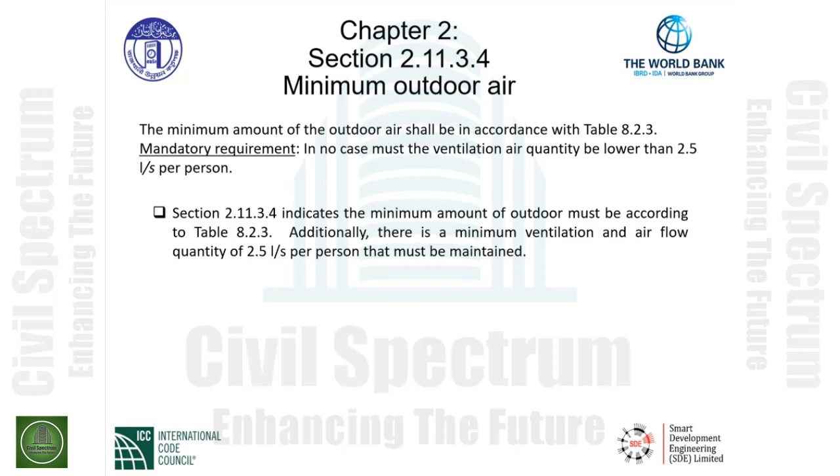Mechanical ventilation. Ventilation systems shall be designed to have the capacity to supply the minimum outdoor airflow rate, determined in accordance with this section. In each occupiable space, the ventilation system shall be designed to deliver the required rate of outdoor airflow to the breathing zone.

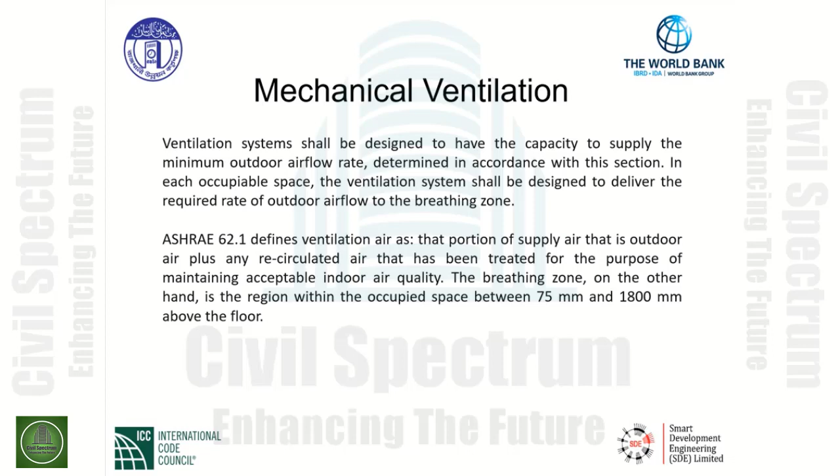ASHRAE 62.1 defines ventilation air as that portion of supply air that is outdoor air plus any recirculated air that has been treated for the purpose of maintaining acceptable indoor air quality. The breathing zone, on the other hand, is the region within the occupied space between 75 millimeter and 1800 millimeter above the floor.

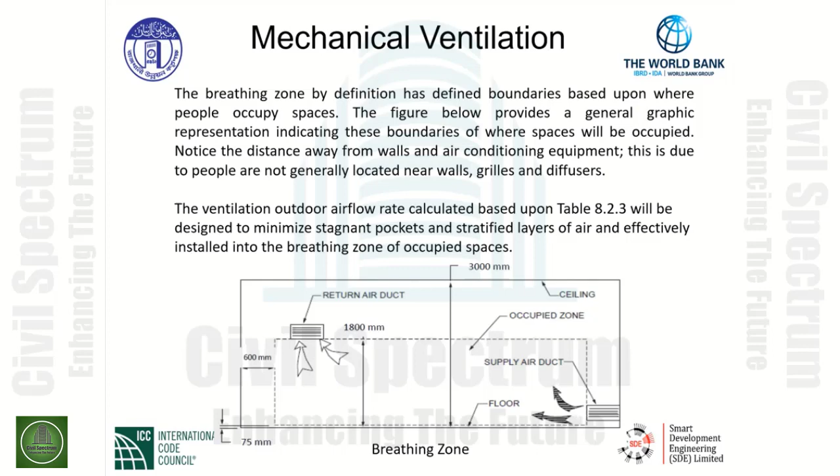This supply air is a mixture of conditioned air along with the required outdoor air for that particular zone that we call the breathing zone. It is then distributed through that breathing zone into the return air duct, and the continuation of supplying clean, fresh air into the breathing zone. So that is the overall basic function of mechanical ventilation in this particular application.

Mechanical ventilation example. We will look at an example applying table 8.2.3 based on the ventilation rate procedure according to ASHRAE 62.1. At first glance, table 8.2.3 may appear to be unclear. However, we will reference ASHRAE 62.1, specifically section 6.2.2, in order to calculate the minimum outdoor airflow rate required to supply a single zone based upon the function of occupancy classification and space air distribution effectiveness as well.

We'll work through an example of a single zone system in a step-by-step method to determine the outdoor airflow rate required in the breathing zone. We will call this V sub BZ. While applying zone air distribution effectiveness, we will call this E sub Z values, as well as calculating the zone outdoor airflow rate, V sub OZ, for the given application. Now, as you can see, the variables that we just discussed are going to be part of the equation.

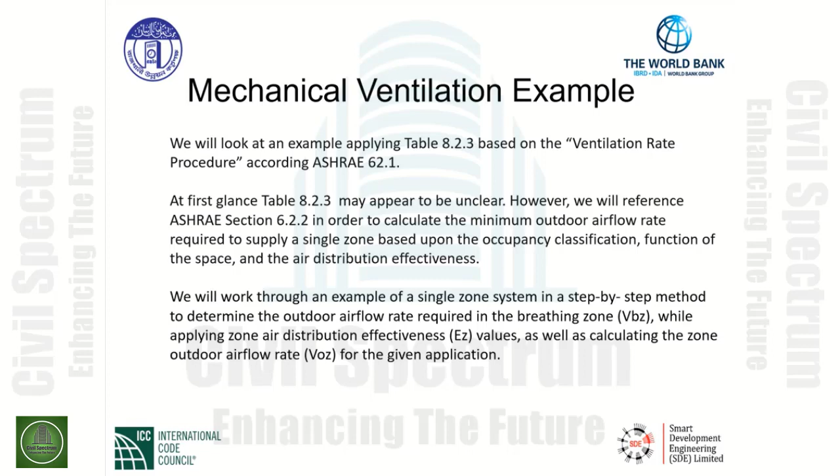As an example, let's consider a new restaurant building is being constructed, and we need to find out by calculation and analysis how much outdoor air is required for mechanical ventilation of a dining room within a restaurant of this new building. Our example will focus on a single zone recirculating system. Two figures are indicated below, figure 1.1 and figure 1.2.

Figure 1.2 on the right-hand side is a picture looking at a part of the dining room construction. As seen, we have supply ducts in the ceiling, and we will have a return air plenum. Figure 1.1 shows the ceiling with finished diffuser and return grill, both located on the ceiling. Below the ceiling, figure 1.1 gives the dimensions of this particular dining room area: 15 meters by 25 meters. We're going to determine the system's outdoor air intake flow rate, which is V sub OT, for the dining room.

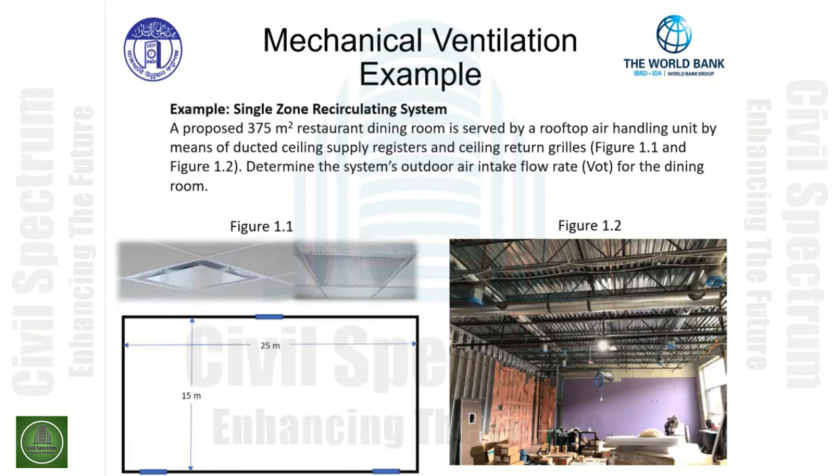Working our way through the example, we need to provide some requirements. In order to determine the system outdoor air intake flow rate, the breathing zone outdoor airflow rate, V sub BZ, of the occupied space must first be determined using ASHRAE 62.1, equation 6.2.2.1. Then, the zone air distribution effectiveness, E sub Z, must be determined in accordance with table 6.2.2.2 and calculated with equation

6.2.2.3. Next, the outdoor airflow rate in the zone, indicated as V sub OZ, must be determined using equation 6.2.3. This is the process for calculating the minimum airflow rate that must be designed to be introduced into the air distribution and conveyed to the breathing zone for our example.

The equation indicated below, equation 6.2.2.1, is as follows. We need to solve for the volume of outdoor air in the breathing zone, V sub BZ. That is equal to the rate of outdoor airflow per person, R sub P, multiplied by the population of the zone, P sub Z. We will calculate the population of the zone using the occupant density given to us from the table.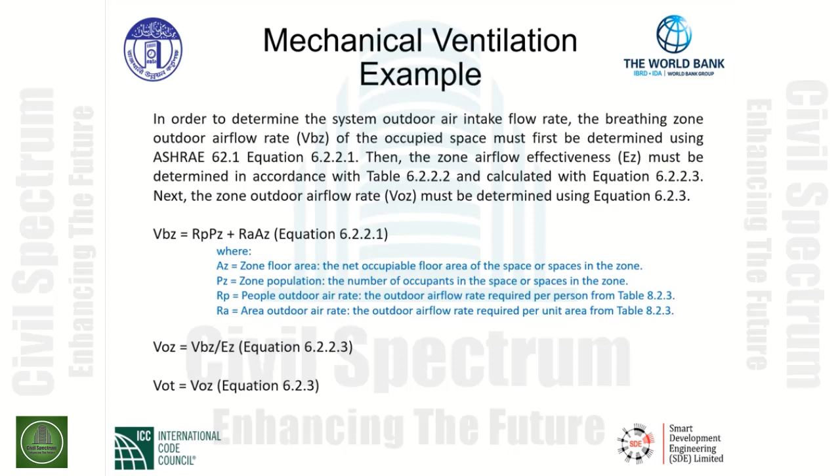V sub OT is our last equation. This is where we will calculate the total amount of air required. And in this case, it's pretty simple. For a single zone system, V sub OT is equivalent to V sub OZ as we calculated in the equation above. Again, this is for a single zone system, equation 6.2.3. Keep in mind, there are other ways to calculate mechanical ventilation for multi-zone systems. ASHRAE 62.1 has other calculation methods for multi-zone systems as well. Our example will focus on only a single zone system.

Step 1 of our example, we will determine the occupant density, P sub Z, for the dining room. Utilizing table 8.2.3 for dining rooms, the default occupant density is used at a ratio of 70 occupants per 100 square meters. Viewing the table below, the category of occupant classification is food and beverage service. The space we will be utilizing for our calculation is dining rooms. Moving over to the fourth column, the value 70 is our default occupant density, 70 occupants per 100 square meters. So we will pick that first.

Therefore, P sub Z equals 375 square meters times 70 divided by 100. This gives us 263 occupants. That is our PZ value, our population of the zone for ventilation.

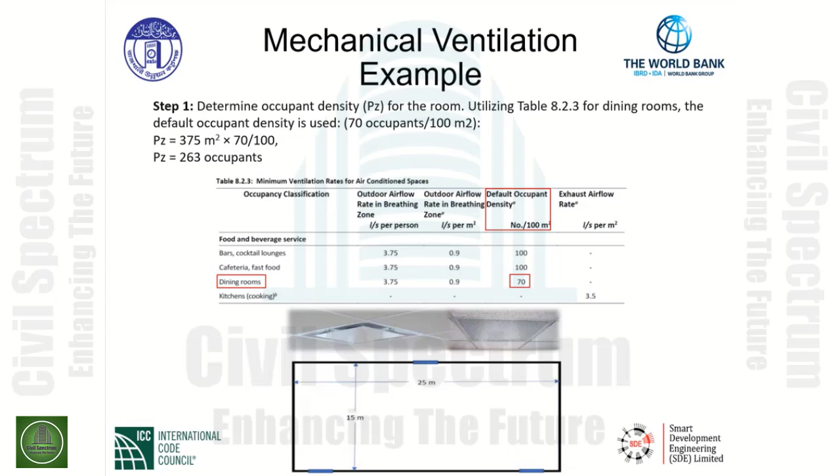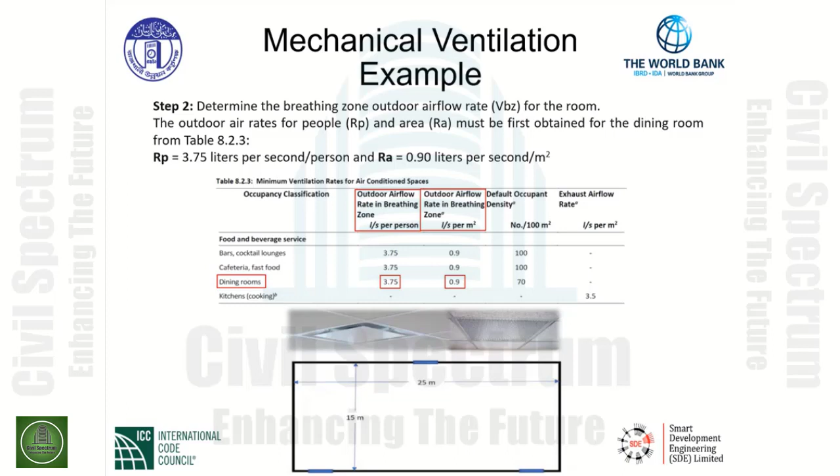Step 2, we will determine the breathing zone outdoor airflow rate, V sub BZ, for the room. The outdoor air rates for people, R sub P, and the area outdoor air rates, R sub A, must first be obtained for the dining room from table 8.2.3. As indicated in the table below, the R sub P value, the outdoor airflow rate in the breathing zone in liters per second per person, is given to us at a rate of 3.75 liters per second per person. And the adjacent column, the outdoor airflow rate in the breathing zone for the area, is given to us as 0.90 liters per second per square meter. So we select those two values for our dining room in step 2.

A continuation of step 2 now gives us our equation. Equation 6.2.2.1 can now be solved. We integrate these particular values in this equation, and as can be seen here, V sub BZ equals the quantity 3.75 liters per second per person, times, remember, our population of our zone, 263 people. We take the product of that portion of the equation and add it to the area portion, 0.90 liters per second per square meter, times the area of our dining room, 375 square meters. Therefore, V sub BZ equals 1,337 liters per second.

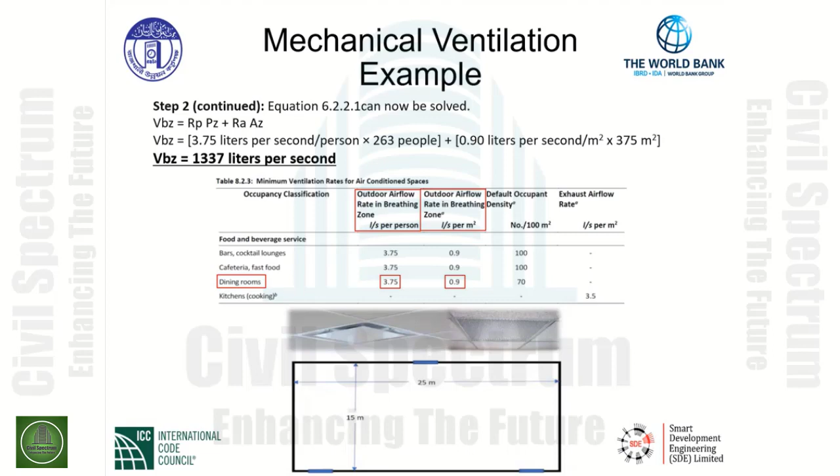Step 3. According to table 6.2.2.2 and applying equation 6.2.2.3, determine the outdoor airflow rate. What we will do is we will now take a look at the outdoor airflow rate, and we need to determine what is called the air distribution effectiveness.

We noted that the supply air and the return air are at the ceiling level. This is important to apply this particular table, ladies and gentlemen. By applying this table in conjunction with the equation V sub OZ equals V sub BZ that we've already calculated, we simply divide by what we call the E sub Z factor that's given to us from the table 6.2.2.2.

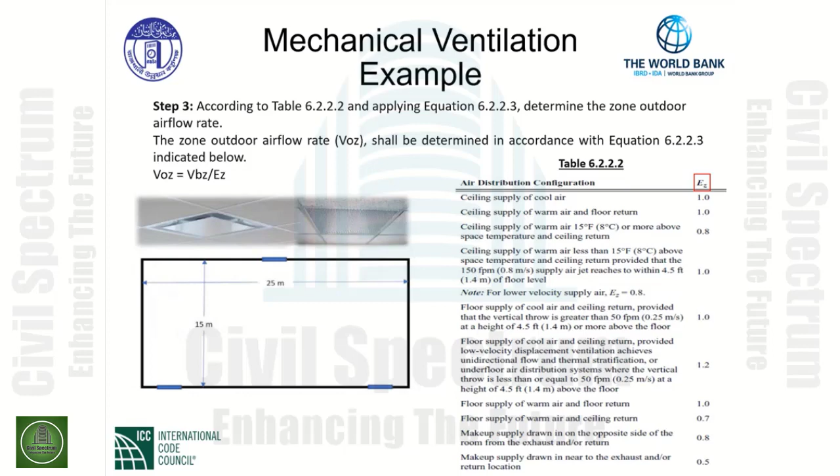Step 3 continued. It's given that the room is served by a rooftop air handling unit. Remember, this is a single zone system, by means of ducted ceiling supply registers and ceiling return grills. Thus, the zone air distribution effectiveness, E sub Z, can be obtained from table 6.2.2.2. In cooling mode, E sub Z is selected as 1.0. Noting the table below, we do have ceiling supply of cool air. We will take that particular value and use it in the cooling portion of the equation.

And in the heating mode, E sub Z is 0.8. This is given to us in the table. As indicated, ceiling supply of warm air, 15 degrees Fahrenheit or 8 degrees Celsius or more above space temperature, and ceiling return. Again, a true statement for our air distribution arrangement accordingly.

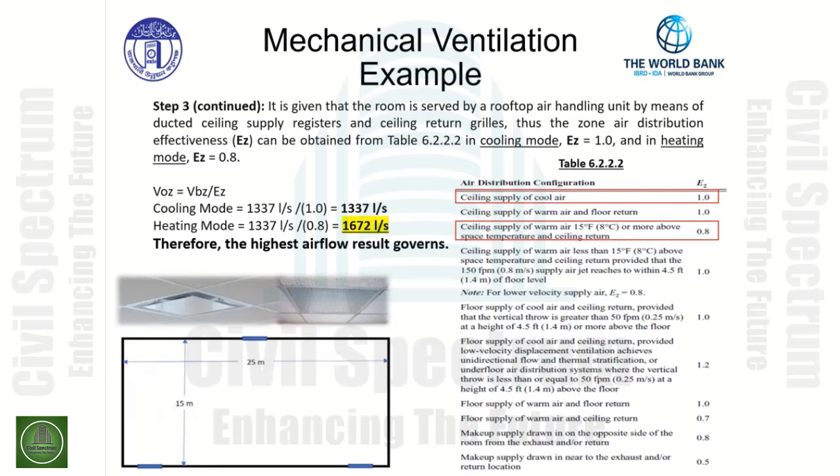Below, we have two calculations to calculate the highest airflow rate. For cooling mode, we simply take our V sub BZ that we calculated prior, 1,337 liters per second, and divide it by the coefficient that we find in the table, EZ of 1, which equals, again, 1,337 liters per second. However, in heating mode, we take the heating mode value, and as seen here in the denominator, it is less than 1, so that's going to drive up the end result to 1,672 liters per second. This is the value that we need to use for our outdoor airflow rate in this part of the process.

Step 4. Section 6.2.3 states that where one air handler supplies a mixture of outdoor air and recirculated air to only one zone, the system outdoor air intake flow rate, V sub OT, shall be determined in accordance with equation 6.2.3 indicated below. Therefore, the total system outdoor air intake flow rate for the proposed restaurant dining room must be a minimum of 1,672 liters per second. As indicated in the graph, it will be designed and balanced such that we will provide this amount of outdoor airflow rate into the air distribution system, mixing it with return air, through the supply air fan and distributing it into the breathing zone accordingly.

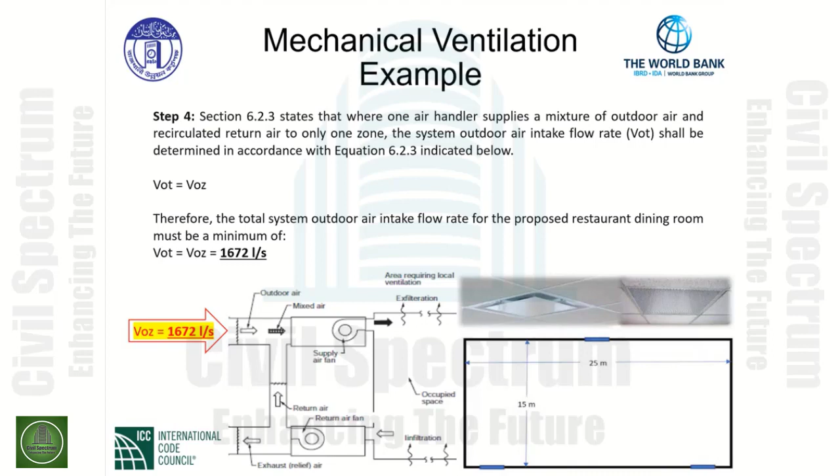This is a good graphic of an example of how the air is returned back to the system on the lower part of the graph. Through the return air fan, we have exhaust relief as well as return going back up and mixing with the outdoor air and then resupplying it to the occupied zone, in this case our dining room.

The last important feature that the designer and inspector must be aware of is that the outdoor air intake openings must be located to prevent contaminants from being drawn back into the building through the ventilation air inlet openings of the building. So the code user is directed to section 2.11.4.5 of this code for location of exhaust outlets, and we also recommend the ASHRAE 62.1 table 5.5.1 titled Air Intake Minimum Separation Distance for information regarding the separation of the air intake and any source of contaminants.

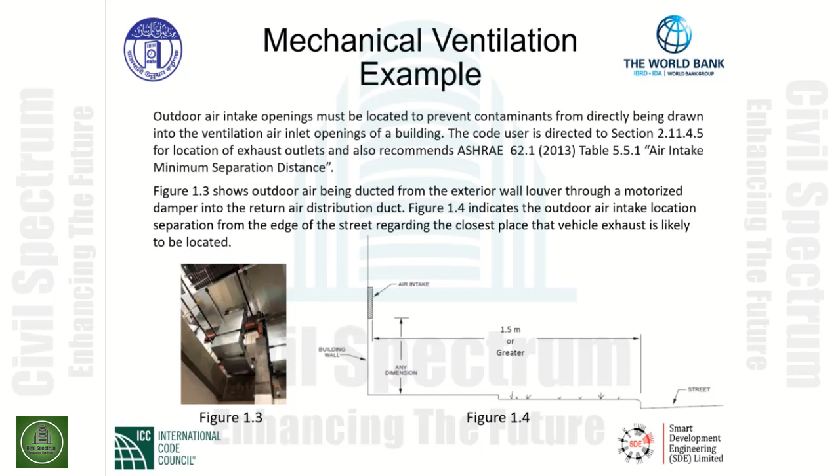We must be concerned with respect to these contaminants and utilize both this code and ASHRAE 62.1 Table 5.5.1 as a resource to properly locate these outdoor air intake openings on our buildings to protect the people and occupants in the spaces within the building.